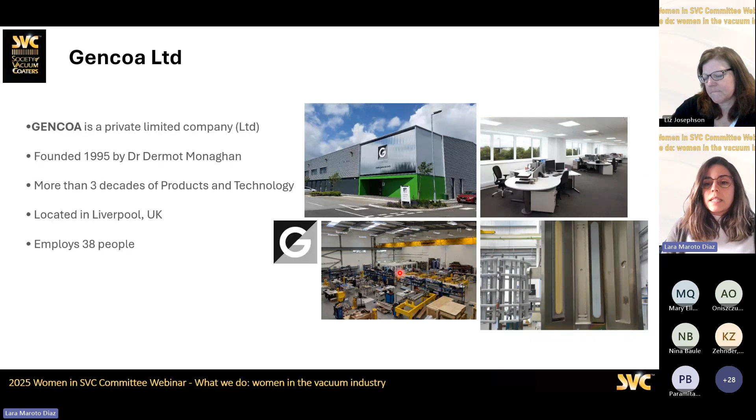More specifically, most of our products focus on sputtering, but there are other products focusing on other vacuum applications. So, a bit about Gencoa.

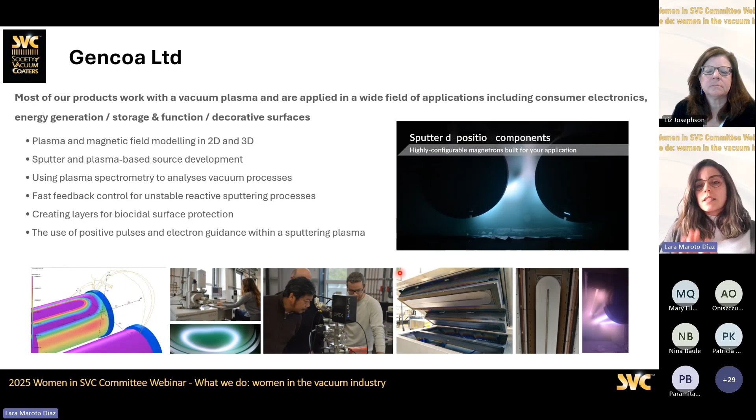We have been applying vacuum plasma for a wide field of applications—I'm going to talk a bit more about the applications later. We have been doing plasma magnetic field modeling in 2D and 3D, developing sputtering plasma-based sources, and using plasma spectrometry to analyze vacuum processes. We can implement fast feedback control for unstable reactive sputtering processes. You can see from some of the images and the video how we have a broad field of application for different products.

I'm going to focus on sputtering within physical vapor deposition, because it's mainly what we make sources for. Here you can see a vacuum chamber. This vacuum chamber is pumped down, reaching pressure levels of around 10^-5, 10^-6, normally. Then this is the magnetron, and normally you will connect a negative voltage to it.

As a standard sputtering setup, you would not have any magnets on the back. But what's special here is that we add a magnetic pack to the magnetron behind the target—that's the material that you're going to coat with.

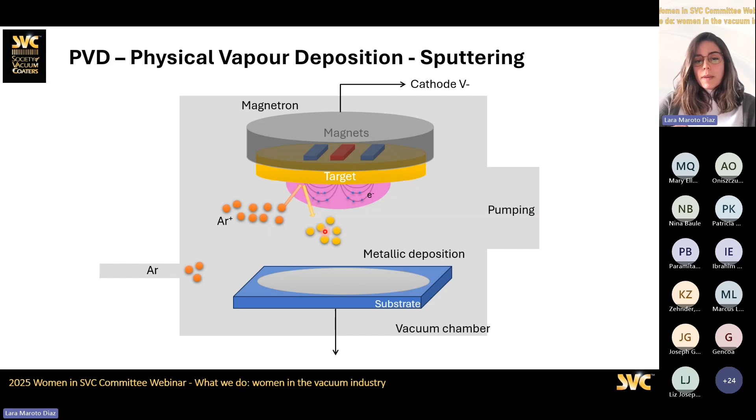With that magnet that contains in the magnetic field electrons that are going to be created, this allows you to lower down the power needed to create a plasma and maintain it. So these electrons, these ionized gas, this plasma that is created is going to ionize an inert gas that in most cases is just argon, so this gas is not going to react at all with the target material. What it's going to do is sputter, so it's going to have an impact on the target, and that is going to release some of the material from the target, which could be many different materials, and that is going to get deposited onto a substrate. And that's what we call normally metallic deposition.

And when you introduce a reactive gas, in this case I have put oxygen, but it could be other kinds of gases like nitrogen, this gas is going to react with the material that is coming from the target, and that is going to form a different type of layer that in this case could be an oxide deposition. And then after that, all these gases are continuously pumping down, so you maintain the level and the cleanness of the vacuum. This is more or less overall how sputtering works.

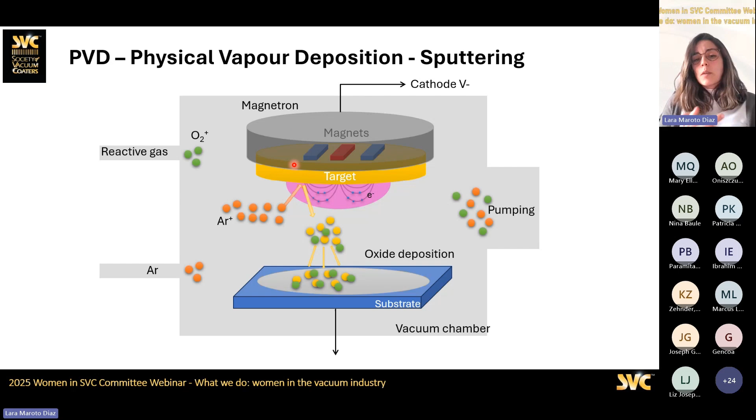So what we focus on is creating these devices, among others, but mainly originally these devices that can be of many sources. You can have different powers, different types of power applied to it, like Anna is going to tell us later. And you can also have so many deposition systems. So I just put in some examples here of ones that I know well.

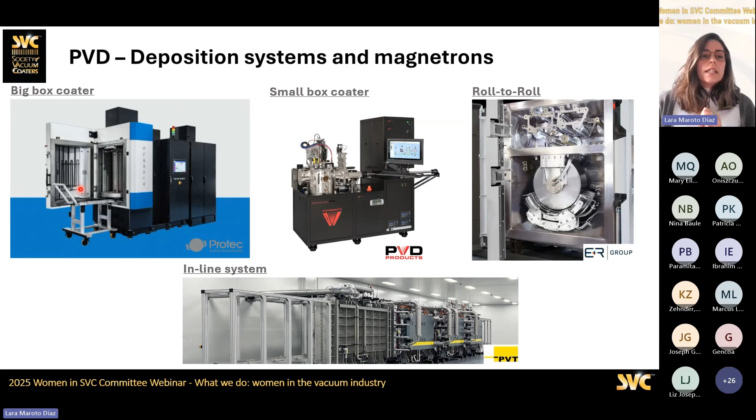So we can have big box coaters, where you can have different substrates that are being coated all at the same time, normally more like 3D or 2D, very small substrates that are put all together. In this case, normally there's so many different technologies that you can use, but for example, a rectangular magnetron is one of the typical products that could be used because it has a larger uniform area, so you can coat bigger substrates.

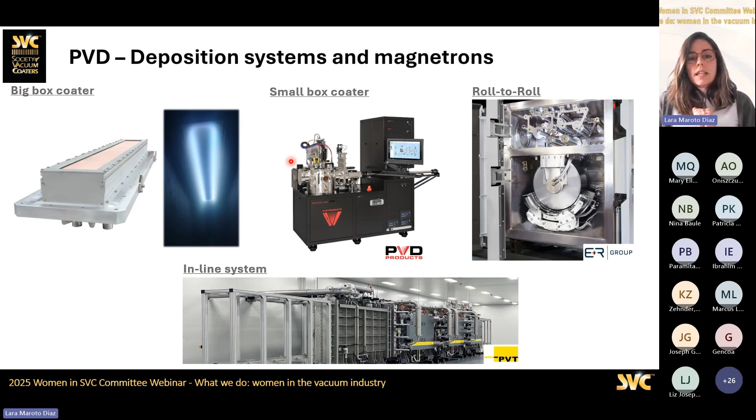Then you can have a small box coater like this one on the right. So normally for this type of small box coater, circular magnetrons are mostly used. It depends on the substrate geometry.

For roll to roll, like Liz is going to tell us later, one of the big products used for it is the ion source. This is kind of the opposite to a magnetron. What we do is use ions to impact onto the substrate and clean it for pre-treatment or post-treatment of the webs that are going to go through it.

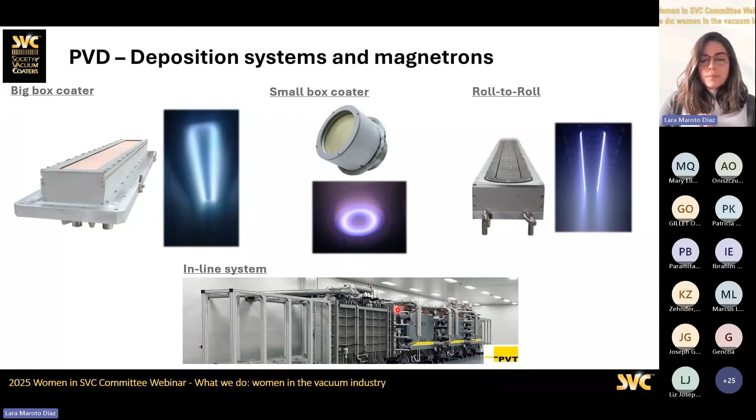And an inline system, this is to maximize throughput. So you put the substrate at the beginning, and that goes into an inline system, all continuously coating, pre-treating, heating, and then it goes out, so you have a continuous production. In this case, for example, some sources that can be used are the rotatables. The target is rotating around, so what you maximize is target use, and you extend the target life.

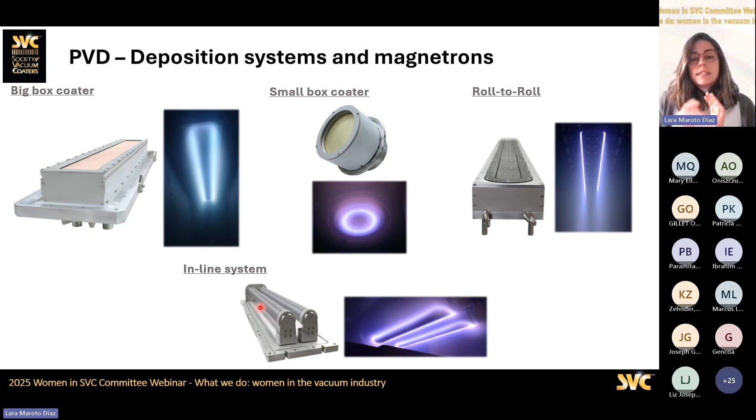Then we could have other different magnetic options, like for example this one, that you can rotate and convert from being unbalanced to more balanced during the deposition. High yield for precious materials. As you can see here, you can use much more of the material.

And we have, in our case, another type of product that is mostly for vacuum applications. In this case, it's used for reactive sputtering control, but also for optics, even if mainly right now it's also used for sputtering and vacuum for PVD applications. It has a wider range of market, since as soon as it involves vacuum, most of them can be used as a gas analyzer, but we are also creating a plasma within it. So it's everything related to vacuum and plasma.

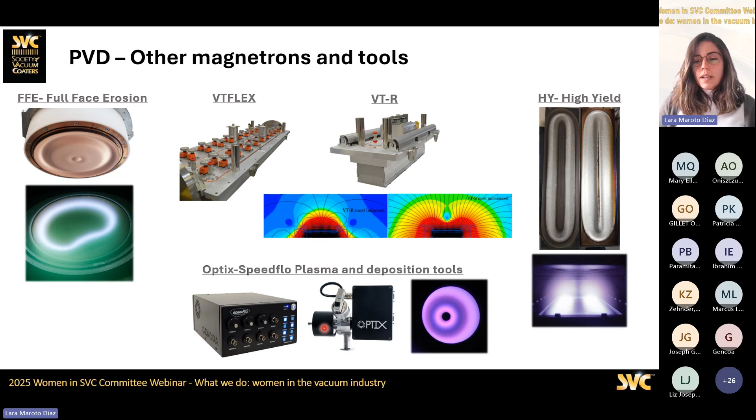So in the applications, I'm not going to go through all of them because I could be here for days, but we have, for example, decorative. As all of you may know, in your phone you have a lot of different coatings that are coming from sputtering, but we have some decorative, more functional, like the ones you have in the phone.

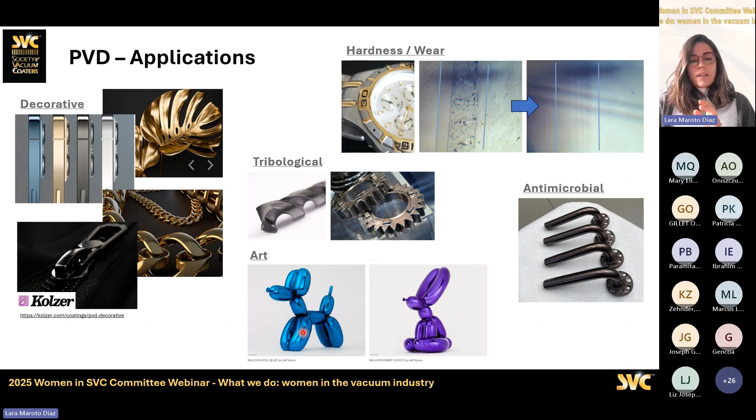You have hardness and wear, for example, for DLC coatings to avoid damaging and scratching of the surfaces. You have tribological for hard tools. You have, for example, nice applications like for art, like the Jeff Koons balloon dogs. We have also antimicrobial for high touch surfaces.

We have also energy efficiency applications, like the electrochromic coatings that you may have seen in planes. For energy conversion, like all the solar stacks that can be created, packaging, like the internal of Tetra packs, optics, transportation, like the glasses of windows and the screens of planes, and electronics, like for the semiconductor industry and all the chips inside your laptops and your phones.

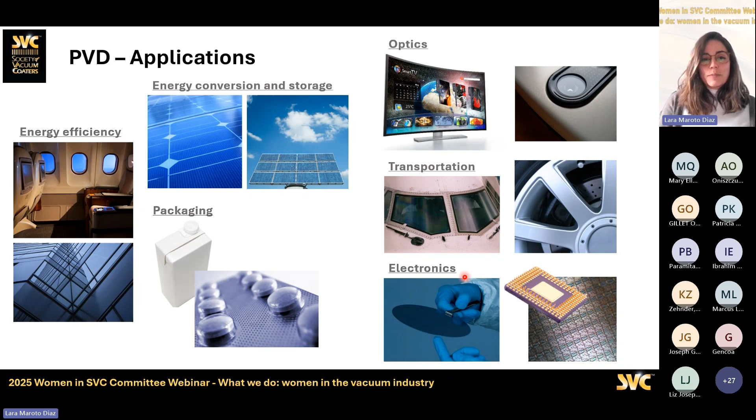So a bit of my journey. The beginning of it was in research and development. I arrived in Liverpool in 2020 on an Erasmus internship. As I was studying a master's in biomedical engineering, I had to do my thesis.

So I decided to come to Gencoa. They offered me a position, and I came to do biomedical application coatings, more focused on high touch surfaces. I was doing basically everything from the coating to analysis, studying technical papers, all related to that, and the antimicrobial tests to test the coatings in-house.

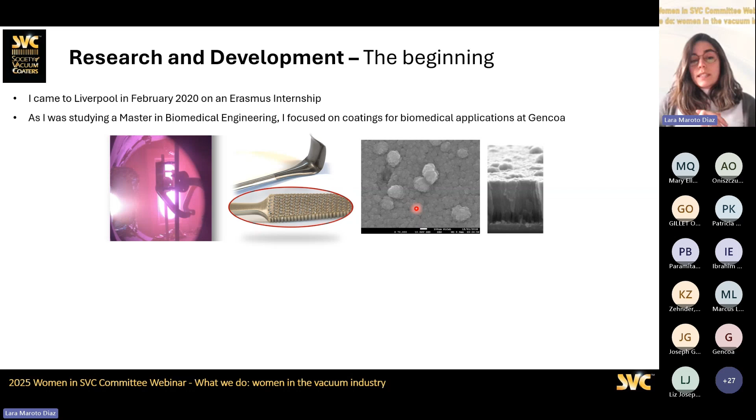At the same time, as I studied telecommunication engineering, I was also involved in the development project of an oxygen sensor called Vacgas. I was developing and designing the electronics and the firmware. So two completely different worlds.

For me, I didn't have any physics background, just the physics I was studying in the degree, but it wasn't related directly to plasma. I didn't know what a plasma was when I arrived. So that was a completely different world for me.

At the same time, I was doing two completely different projects. The Vacgas is something we use for vacuum analysis for oxygen, but it's not really related to vacuum, what I was doing. So as you can imagine, it was quite far from what I was really studying at the moment or anything I had learned before. So it was quite a shock.

And at the same time, it was in another country, not my first language. So it was a big change. And also it was during COVID time, so you can imagine.

Then from 2020 to last year in July, I have been working in R&D, so at the same time I started to be involved in many different projects for government grants. We have some government grants we have been applying for, developing new technologies in collaboration with different companies, but also for some customer applications.

Some of the customers can have some of the lab developed coatings and they want to industrialize it. So we are like in the middle there, developing some of the coatings here in bigger machines, and then we can also advise on how to create an industrial production for it.

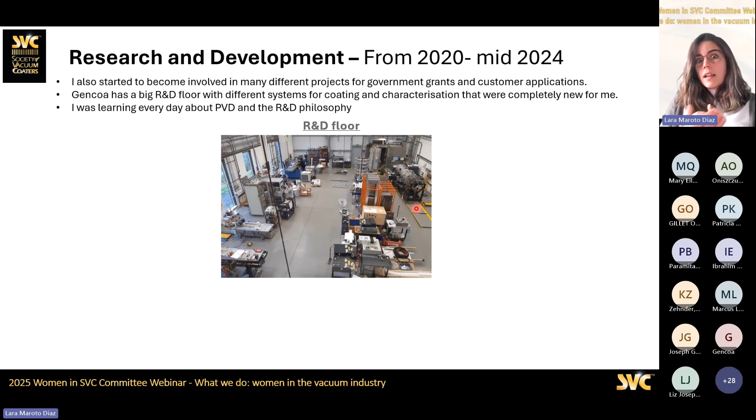So we have so many coating systems, I think it's nine of them. They have different magnetrons, different applications, different geometries. We can do 2D, 3D kind of inline systems, but a small one, and we have a big one like this one that you saw on the left with 1.5 meters.

So I was, as you can imagine, every day learning a lot of many things. But it was so interesting, and obviously I really learned about PVD, and everything is impossible because this is like a lifetime learning. But I also learned about the R&D philosophy behind it.

So we have a lot of characterization systems too. We could have more, but for that we use universities. We get help from universities and research centers to help us with that. But we have a few of them here. So many of them I didn't know anything at all about.

So it was also a learning of how to measure light transmission, reflection, all the antimicrobial coatings, the SEM. So it was quite a broad spectrum of things that I had to learn.

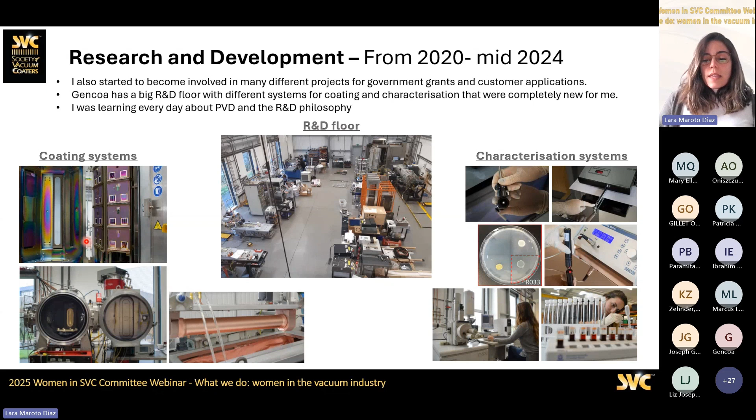And then last July, actually, when I was at SVC 2024, I was one night sleeping after a whole day of conference, and I decided that I wanted to give technical sales a try, because I really enjoy talking with the people at SVC. They taught me a lot of things I had never learned before, one way or another.

You learn a lot from customers, what are their necessities, what do they want. You learn how to listen to them and how to answer the questions. That is different than being in R&D.

So I decided to go for it. It was good because with all the technical background I acquired for 4 years in R&D, I had many things that I would not have had if I would have changed directly to another company. So it was fantastic. I obviously like Gencoa a lot, so that's what I decided also to try it internally.

Obviously, my post-its are my best friend right now. Everything that I have to ask or have in mind goes into a post-it. I know it's not a very sustainable option, but they save my life right now.

I have obviously a lot of questions still, because even if I have some of the basic and important technical knowledge from R&D, it's a lot of new questions now into sales, into design, the intrinsics of the products, applications. You have to understand what the customer wants. You have to know how to ask the questions properly so they can understand you. It's different countries, different languages, different ways and cultures and applications.

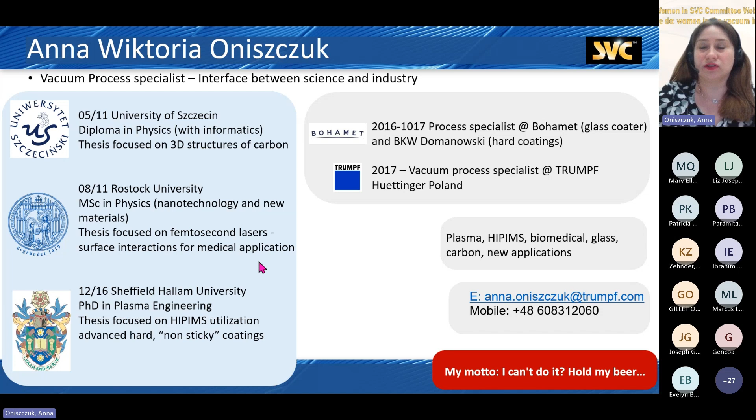And then in 2017, I moved to Trumpf Huettinger because it gave me a lot of options in developing myself and in researching with HIPIMS technology. So I could go more and more into this.

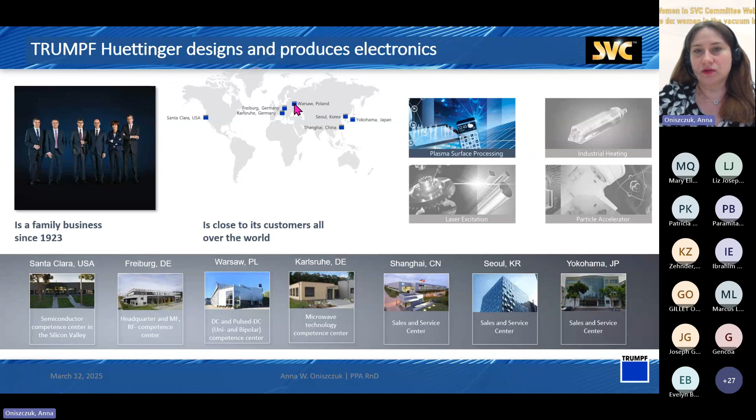Trumpf Huettinger is a family-owned business. Generally, Trumpf is a big company with a lot of branches. I'm in the plasma surface processing, and it has a lot of units. I'm located in Warsaw, in Poland, and I'm located within the R&D technology team.

In the R&D, we have the plasma application group that was started in 2018. And the interesting thing is that we have quite a few women in here. So we have 3 within the 9 people in the group.

So I think for the statistics, it's quite nice. And in Poland, because it's divided by also different locations, and in Poland, most of the people sitting in the office are women. So I think it's quite nice to show here that in Trumpf we look also about the quality of the people, and we don't look at it that only men are going into technology. So we have quite a lot of girls in here that I really like.

And now let's go to the journey of HIPIMS. So I will give only the basic information, because with HIPIMS I can talk for hours and hours, and I hope that I will not take too much time here.

So when we think about magnetron sputtering, typically there will be a DC discharge when you deliver power over time with a constant manner. And sometimes there will be also pulse DC. And you will operate in about the kilowatts range. And if you want to go to denser coating, harder coating, you want to increase the power.

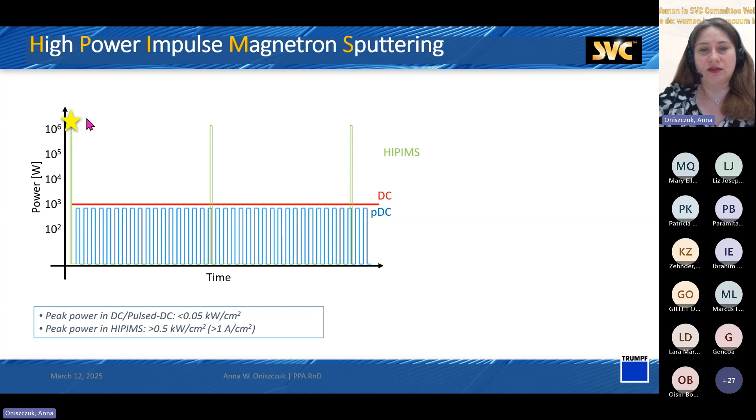With HIPIMS, you can go with very short, very intensive peaks that go to megawatts, and then it will provide you very high ionized flux of the sputter material. Because it's only 30% maximum duty cycle, it gives a lot of energy within a very short time, and then gives time to cool down for the system and power supply to charge up. Again, delivering pulses, high power, high flux.

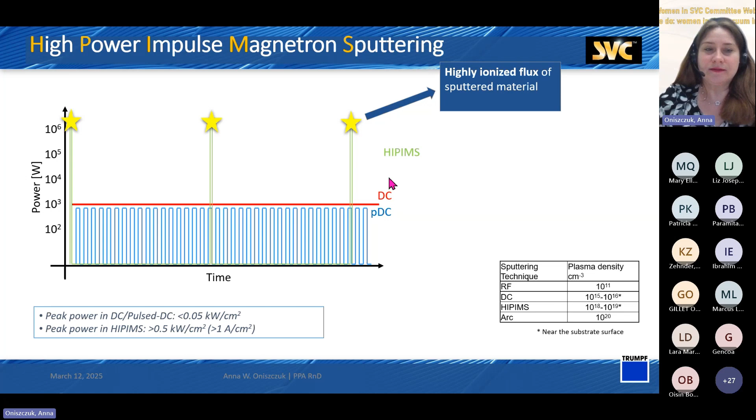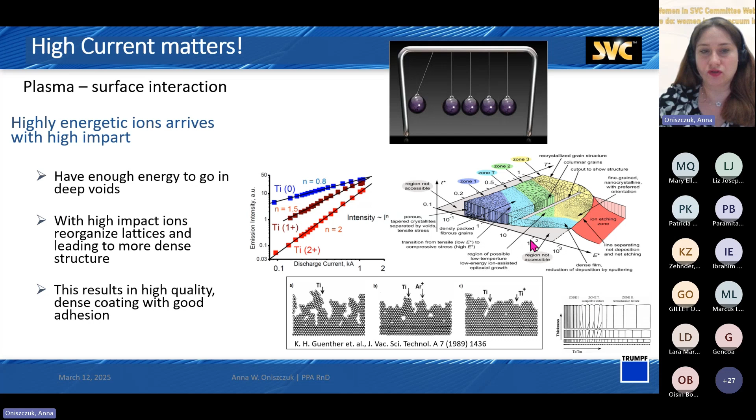So what happens? When you have very high energetic plasma, you have a very good plasma surface interaction. So you have accelerated ions that arrive to the substrate, and by hitting one another, they can densify the structure. More ionized plasma, more plasma current you have inside, the better structure you have, more dense, less voids in between, and thus the mechanical properties of the coatings are much better. That's very good for a lot of purposes, and you can have a very good smooth surface - you don't have so many macro particles. You can improve the adhesion, and you can get very good control over the stoichiometry of the process.

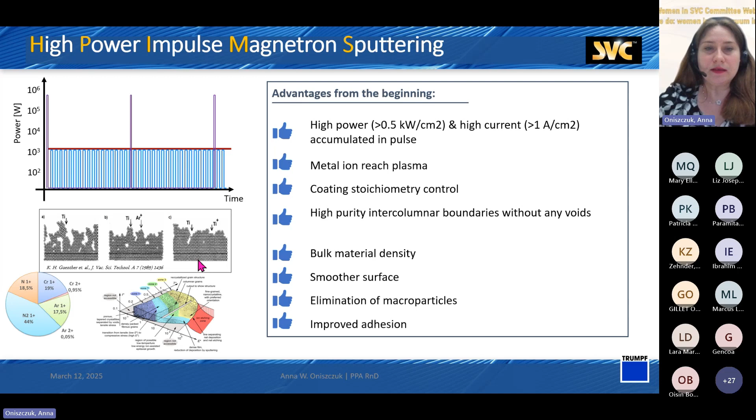Just very quickly comparing with DC: within DC, you have very limited power, only at the low energy level. You can see that it's mainly dominated by gas - by the argon ions and argon neutrals, and also by the gas, if you have reactive gas like molecular and some dissociated nitrogen, that will lead to a very columnar structure, and you can see some voids in between the system.

In case of HIPIMS, the energy is delivered at also higher levels, so you can have both low and high energy, and this leads to plasma that has a higher ionization level of argon. But what is most important, you will have much more percentage of the chromium, and also much more dissociated reactive gases, which you can control the stoichiometry of, and that will result in a very dense, very hard coating.

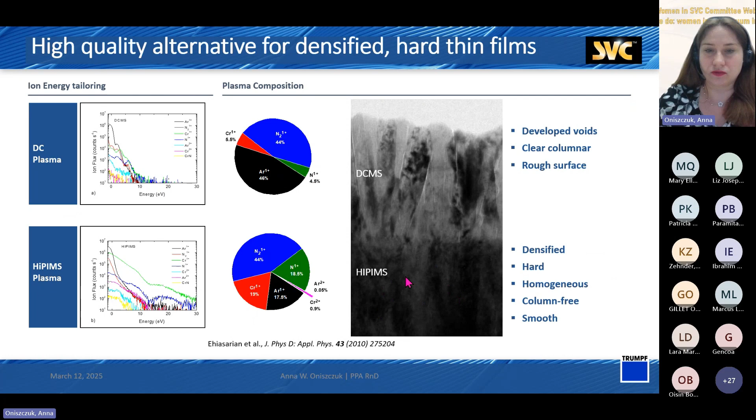Hard and dense coatings you can also get with cathodic arc deposition. However, here's the problem: cathodic arc is a bit different technique, where you deliver a lot of power within one spot, and there are some effects where you have melting on the target, and you create a lot of droplets, and then these droplets will solidify on the surface, leading to macroparticles, which can, for example, fall off and lead to lack of corrosion resistance, and also lead to a very rough surface.

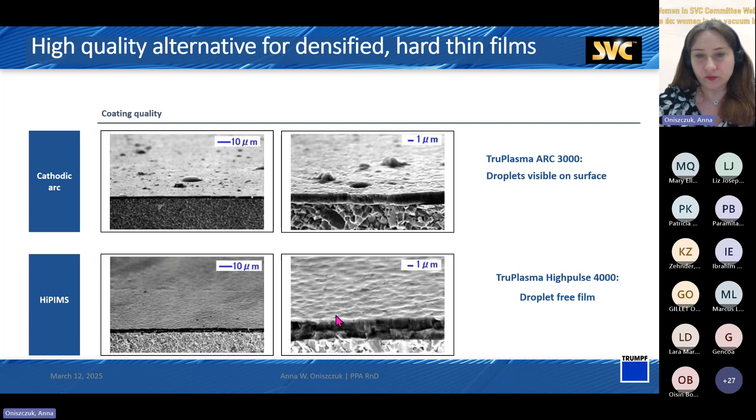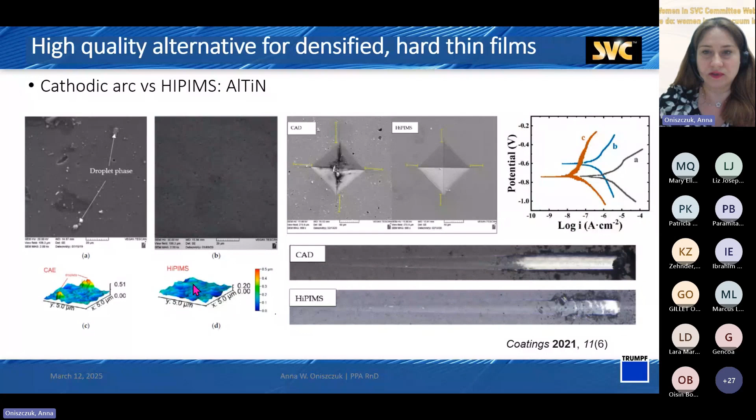With HIPIMS, you can obtain very good smoothness, good density of the coating, and very good properties of the coating. Here is some research comparing HIPIMS and cathodic arc, and the mechanical and corrosion properties were much better. So here is the corrosion: A is the bare substrate, B is the cathodic arc, and C is the HIPIMS. Also in the imprint, we can see there is much less damage. And from the scratch test, we can see that the load is much better and the roughness is much lower of the substrate. That's just one example.

Then the applications - there's a lot of applications limited here by time, but the main ones were cutting tools and also some anti-corrosive properties of the coatings. Now, quite often we can see applications for microelectromechanical systems and some micro tools, solid lubricants, anti-reflective and anti-scratch.

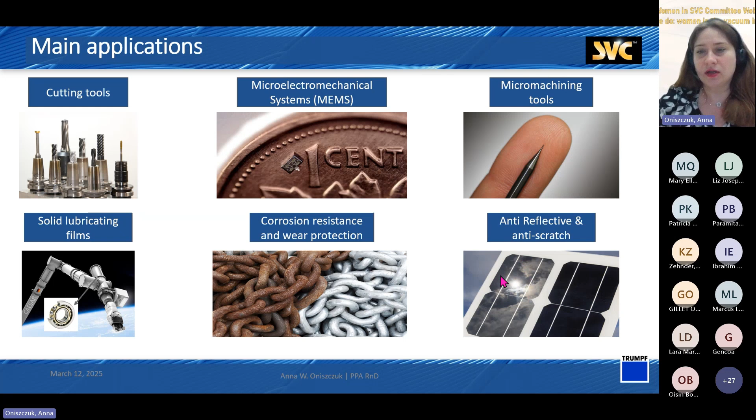For the anti-reflective and anti-scratch, I want to show you some results made at Sheffield Hallam University, where we investigated silicon oxide film, and the hardness was increased compared to the standard technique. We investigated the influence of different parameters like reverse and reverse delay on the transmission. So not only can you increase the hardness, but you can also tailor some transmission optical properties in order to get a very good protective top layer.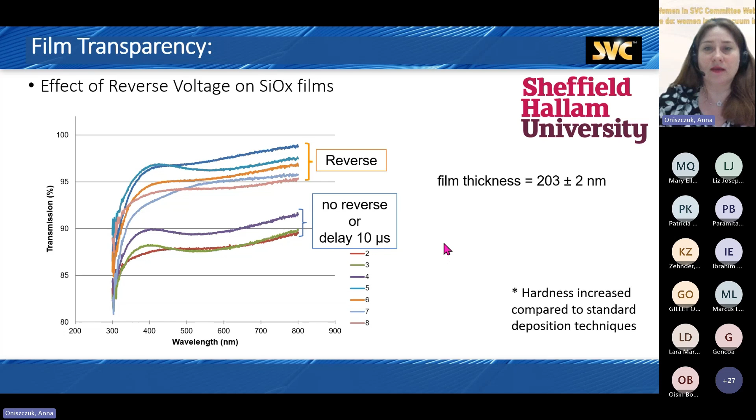However, there are some downsides of HIPIMS, because when you have a standard process, any process, there are a lot of parameters that you have to take into account. So the properties of how you grow the coatings will depend on the gas properties, what substrate you have, the material source, what target type, what target material, also how much energy within the plasma you have, and also the power supply - how you will run it, which kind of power supply, which kind of discharge.

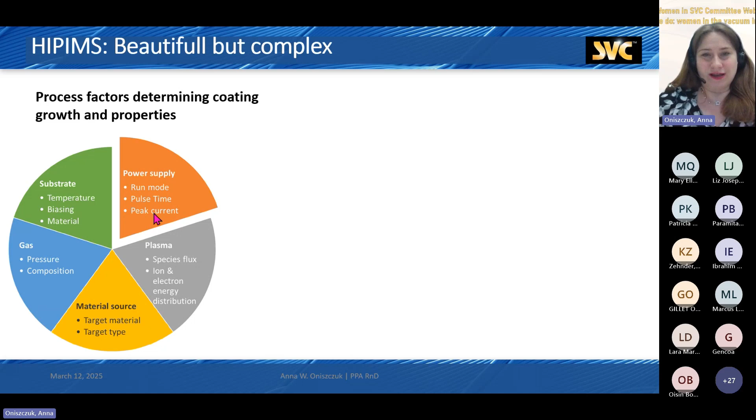When it comes to HIPIMS, there are quite a bit of other things you have to think of. There is big influence from magnetic fields that will lead to self-sputtering. And within reactive sputtering, you have to be more careful than with DC, because there is more dissociation. So you have to know what you're doing. You can control it very well, but you need to take into account much more reactive processes.

There are plenty of different modes and shapes on the market, and for different applications you need to use some other setup. Sometimes you need reverse, sometimes dual magnetron sputtering, and there are multi-shapes - this is a lot to take into account. It's part of my job to support with this technology.

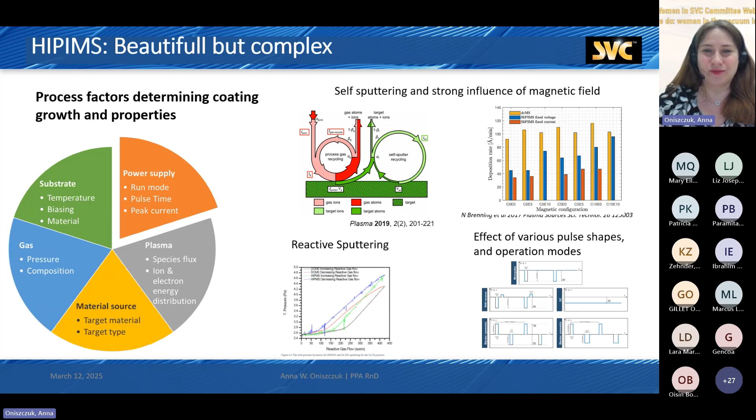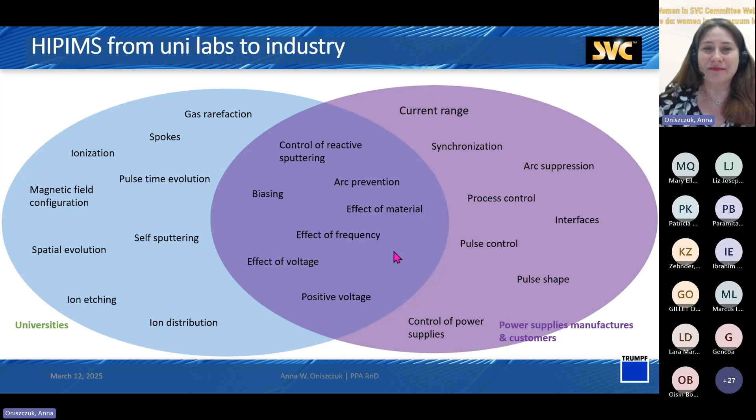There is a lot of investigation, both from universities and power supply manufacturers, because there are so many topics still to investigate. Some of them are already known, but there is a lot to dig into. That's why it's so exciting - it's a mature technology already used in industry, but there is so much more to dig in, to investigate.

So what do I do in my work? My position is vacuum process specialist. My first task is in-house and on-site customer support. There is a lot of customer training, because customers need to know how to use this technique, how to change from, for example, DC sputtering into HIPIMS.

I support product development, and I do some tests in the lab, and this also leads to chamber maintenance, because if you work a lot with the chamber, you need to make sure it will be working.

On the other hand, there is a part of R&D with internal and cooperation research, where I need to do scientific papers, look for possibilities for more cooperation, and there are also some project manager tasks.

And the most fun part is knowledge exchange and scientific marketing. With the information I gather, I attend conferences to share information, I can do networking, also some marketing writing, and in order to get more knowledge I also attend trainings and workshops.

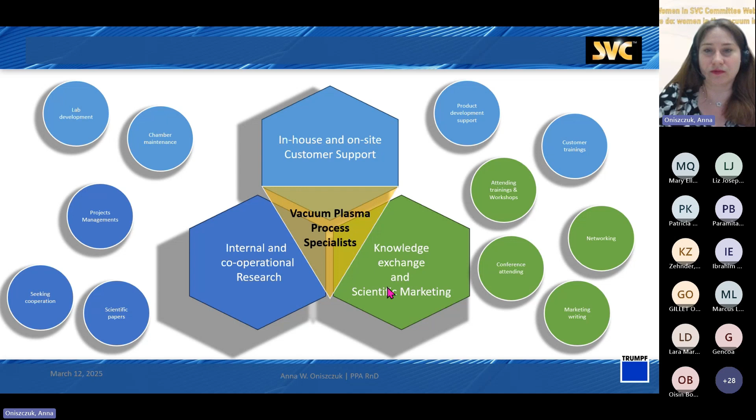From in-house tests, we have different chambers in the plasma group where we can do different kinds of tests. We can do plasma tests in the chambers, like a small chamber for a batch system. Also here we deposit samples, then the samples we can test.

However, most of the investigation we do with the plasma, with optical emission spectroscopy, and with a homemade plasma current probe, because this gives us very fast indication if we're going with this process in the right direction, if we increase the energy, if we increase the quality of the plasma. Then we can deposit coatings and do simple tests, or do cooperation and send samples for investigation.

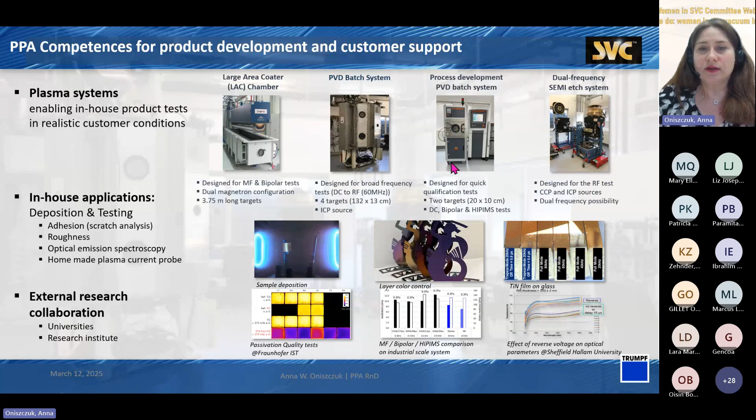To summarize, I really have a big passion for HIPIMS technology, and I love working with developing applications and HIPIMS itself. There is still much to discover with HIPIMS, and Trumpf gives me the opportunity to do that. If you have any questions, you can send me an email or call me.

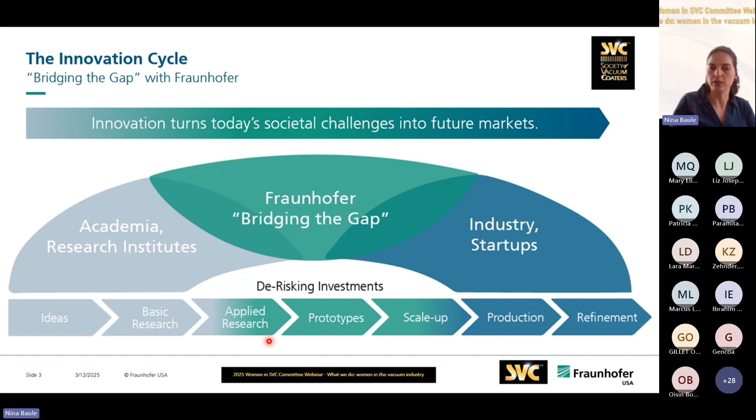Our funding mechanism has a big variety of government funding as well as industrial funding. On one hand, we do a lot of public research where we apply for federal or state funding, usually in cooperation with a university as well as national laboratories, for example.

This public research is really often supported by internal research activities that we do. These could be on a Fraunhofer USA level, but also on a global level, where we specifically partner a lot with German Fraunhofer institutes to drive certain competence areas forward. On the other hand, we also have industry customers where we do R&D work for them because they might not have the capacities at their own facilities to do this work. That shows you very well what I, on a daily basis, interact with - a lot of interactions with MSU professors and national laboratories, and then on the other hand, my industry customers.

Coming down more into Fraunhofer USA, it's a non-profit organization here in the US, and there are basically three main centers. One is in Maryland, where we focus on software development and artificial intelligence. Then there's one in Boston, where we focus on automation. And then there's the one in Michigan, that's where I'm located - the Fraunhofer USA Center Midwest.

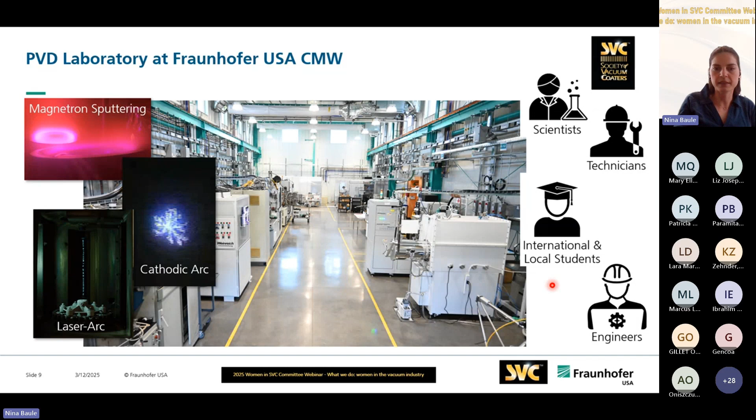The overall idea of what I do on a daily basis is developing thin film materials using PVD technologies. How I usually do that is I have a process, for example magnetron sputtering, shown here schematically, and I change my process parameters and see how that correlates with my material properties and material performance. This is basically a back and forth until I really have the function that I want from my thin film material

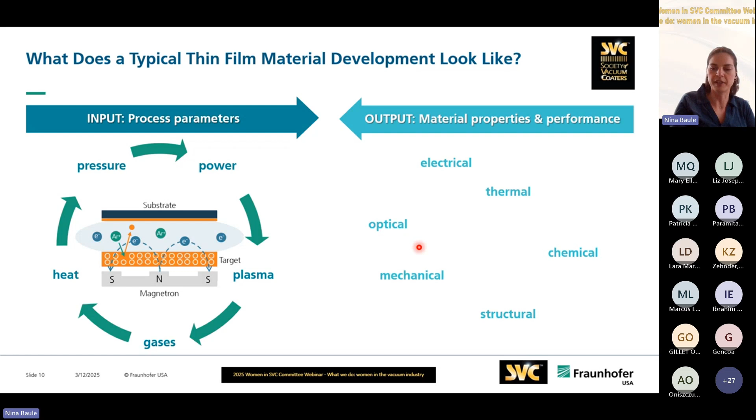that is for a specific application. The properties depend very strongly on the application. One example here is nitrogen incorporated tetrahedral carbon materials - this is the work I did for my PhD. I wanted to use this amorphous carbon material, also known as diamond-like carbon, and move away from typical wear applications for this material and use it for electrochemical applications.

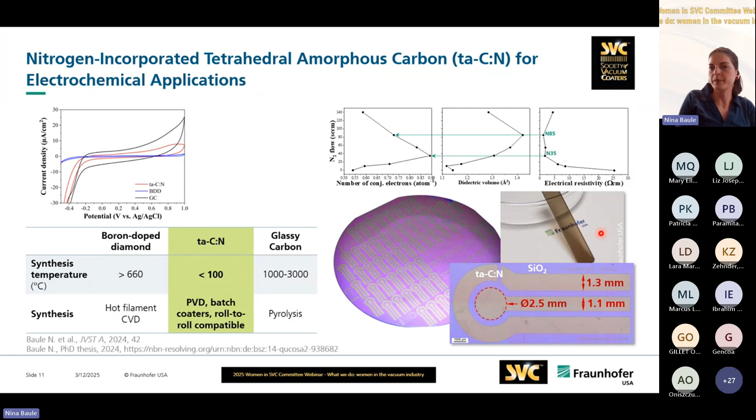So the overall scale-up and economical advantages are very clear, and we can potentially deposit it directly on polymer substrates. For my work I focused on the material properties. An example here on top is where I looked specifically at the electrical properties of these materials with a novel technique, and then used that knowledge to develop the actual application. Here on the bottom you see a 4-inch wafer with so-called 3-in-1 electrodes, typically used in environmental sensing or medical sensing, to push this electrochemical application or sensor forward. Another one was to develop an optically transparent electrode, which you see over here, which can be used for spectroelectrochemical analysis.

Another example for magnetron sputtering - what I showed before was an arc technology - is that we investigate a lot the single beam ion source enhanced magnetron sputtering, where in collaboration with one of our MSU professors who develops these ion sources, we try to enhance the material properties with this enhanced ion beam. The idea is really to densify the film and have another basic knob that you can turn to change your material properties. Here you see an example of indium tin oxide, where you can clearly see that the crystalline properties of the material change with the ion source voltage.

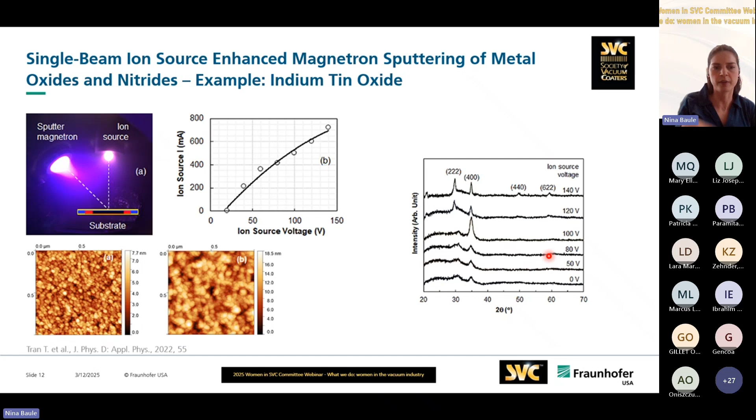So these are just a few examples I wanted to show you. There are far more that we work on, but that was it from my side. Thank you all so much for your attention.

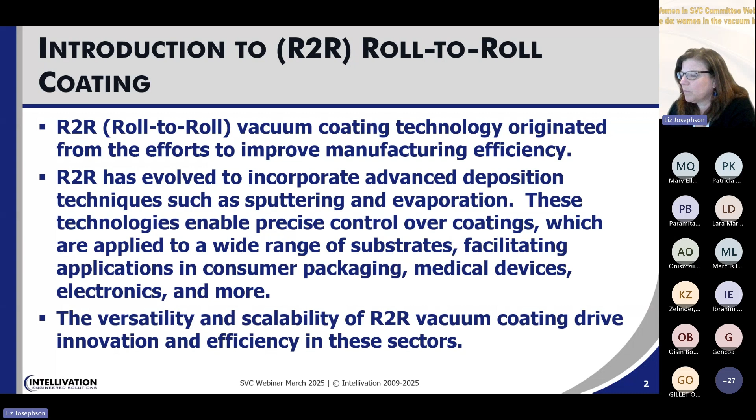Roll-to-roll technology has a lot of benefits. It has some limitations, but it does have a lot of benefits, and one of the biggest is that it's a very versatile and scalable technology. So you can develop a product and then transition to roll-to-roll. As long as you can get a material in a roll format, a substrate that you want to use, you can theoretically do vacuum deposition on it. So as long as you have the functional material that you want to put on a substrate, either optically or mechanically, or other properties that you're looking for, like barrier properties, if you can put it onto a roll-to-roll flexible substrate, you can theoretically use vacuum roll coating technology.

So this is the really cool thing about this technology, is that using the same type of systems, you can touch so many different applications. I know Nina talked a little bit about that, but just in roll-to-roll - this is not talking about hard coatings, this is not talking about glass or anything else, or semiconductor, this is just roll-to-roll technology.

So we cover a wide range of applications: electronics, energy with photovoltaics, batteries, solar control, window films, you have sensors, biomedical sensors, diagnostic sensors, and I'll show you some examples of that. And there is also a whole other range of applications: aerospace, barrier, optical coatings, holograms - I'll talk a little bit about that - security and anti-counterfeiting, and other specialty applications.

And all of these have a long list of requirements, but the key to what I'm talking about, and this is focused on, is the flexibility. Flexibility can be looked at two different ways for roll-to-roll. One is that you need a flexible substrate - it has to be able to be wound onto a core and put into a vacuum chamber and unwound and then rewound.

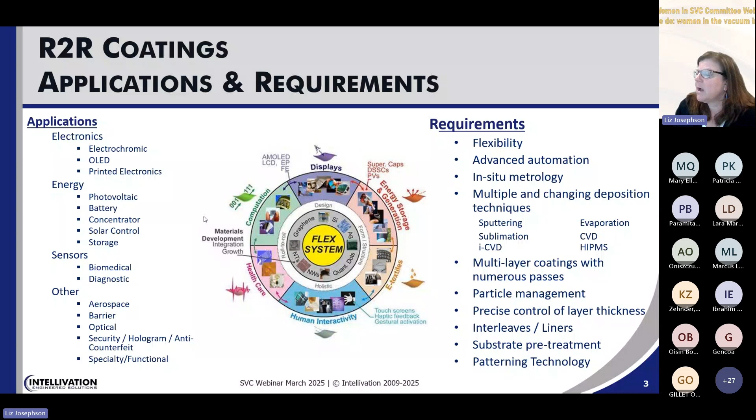But flexibility also means we can have a variety of different sources. We can do a lot of different things to the substrate as well to have it perform to the final needs of the customer. So there's a lot of things that go into a roll-to-roll technology, into a roll-to-roll product, and I'm just going to touch on these very, very high level.

The most common roll-to-roll application is in the food packaging industry, and all of these technologies, I'll say, are global. Especially food packaging - it's the largest market by volume, and there's probably the most number of roll-to-roll vacuum coating machines installed for this technology. So you're running at very high speeds, up to 18 meters per second.

You're putting down a very simple aluminum layer, but it's providing a barrier, and the barrier allows for, just in snack foods, either a light barrier, a water barrier, or an oxygen barrier. So it's really applying 3 different types of benefits to the product, and that's the biggest volume of materials used for that.

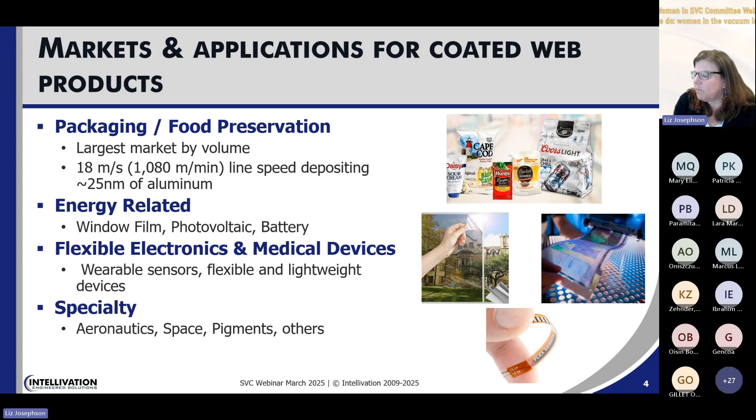Then you have other applications which I touched on: energy related, flexible electronics, medical devices. Most cell phones have a flexible transparent conductor in them, as we go to lighter and lighter weight cell phones. And then you also have a lot of specialty other applications.

So just a very general overview of how roll-to-roll works: everything has to be put in a chamber and pumped down. So you need, as I said before, your substrate in a roll format. You put it into a machine, you typically unwind it. Typically it's coated on a drum so that you can handle and work towards thermal management issues, heat or cooling related, and then you rewind it. And all of that is done inside the vacuum chamber.

So there are different ways to do that. Very few have done it in free span, where there is no drum associated with it, so they don't have as much control over the thermal management of the substrate.

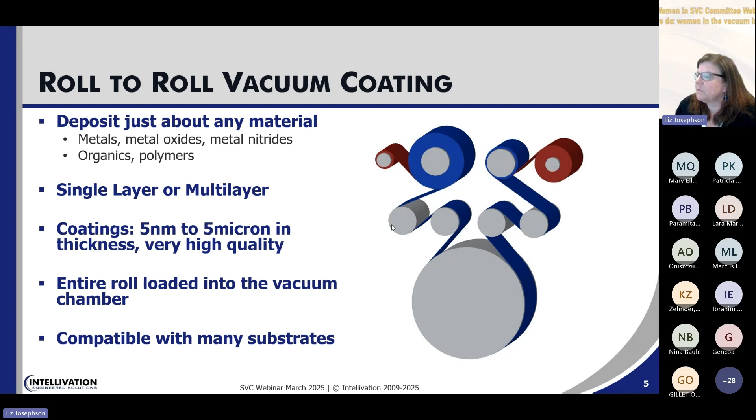But typically there is some sort of drum that is supporting your web, so we can do a ton of different materials. The nice thing about this is you can deposit a lot of different materials, and we've also run a lot of different substrate materials, and I'll talk a little bit more about that in a minute.

This just kind of gives you an idea of how broad vacuum roll coating deposition is. So when you look at packaging and window films and holograms, gift wrap, things like that, more commercially available products, they typically start about 2 meter wide machines and go up to 4.5 meters wide. That's a pretty significant amount of material that you're moving through at 18 meters per second, for food packaging and things like that.

Then you get into a little more specialized products, like solar control and window film, and they're about 1 to 2 meter wide machines. What Intellivation focuses on is systems typically that are around 0.5 to 1 meters, although we do the 2 meter machines as well, but these are more for fixed display applications, optical coatings, multi-layer coatings.

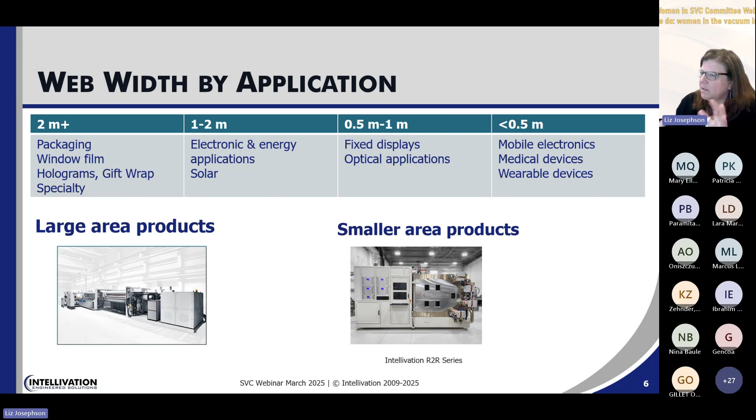There's also a market for smaller, less than half a meter machines. So you can look at mobile electronics, medical devices, wearable devices. Don't forget that some of these devices can be very, very small, 1 to 2 centimeters, or even smaller than that in millimeters. So it really depends on what your end product needs to be as to where you fit into this array of different sizes of systems.

There's also pros and cons for each, depending on where your application falls. When you look at these high speed machines, you have very high speeds, but you give up some things in terms of multi-layers or different functional layers that you can deposit in these systems. But throughput is very high on these wide systems. So you need to understand what your end product is, what sourcing you need, and what kind of line speeds match up with what kind of system would be perfect for your roll coating needs.

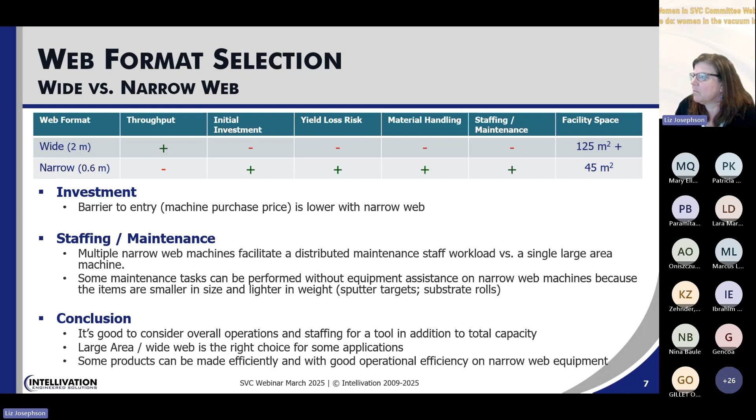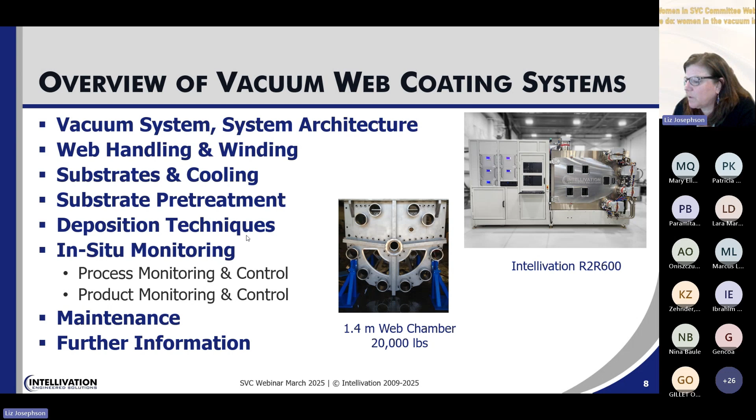This just shows you a couple of different systems, and when you look at the overall architecture of a vacuum roll coating system, there's a lot of things that come into play: web handling, substrates and how that can be impacted, surface substrates and cooling, as I talked about cooling drums before, pre-treatment, different deposition technologies as Lara mentioned, different power supplies as Anna mentioned. And then also, since most of our systems go into industrial applications, it's very important to have in situ monitoring, which I'll touch on for a moment too.

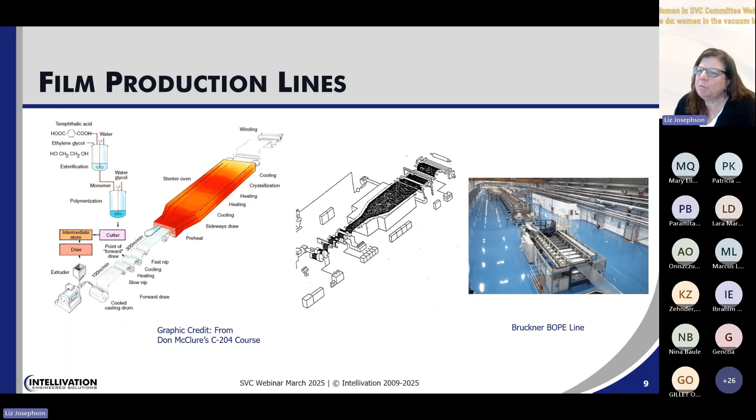When you think about this and look at high volume food packaging, this is just an example of two different types of high volume substrates that are made: one is polyethylene and one's polyester. These are made in very high volumes. Then you can look at an OPP line, which is biaxially oriented polypropylene, and those can be up to 8 to 10 meters, and I think 12-meter wide lines now. That's a huge volume of material, and a large part of that needs to be vacuum coated. So that's where you look at systems that are 2+ up to 4 meters wide, running at 18 meters per second.

When we talk about different kinds of applications, there's a wide range of materials that can be run. Typically not in those big machines, you don't see the flexibility there, but as you get into smaller sized machines more focused on sputtering technology particularly, you can look at different polymers, metals, as long as they can be rolled, textiles, ceramic, rolled ceramics, flexible glass - we've done a lot of work on flexible glass. It also depends on what your temperature requirements are, your optical requirements, whether you need a transparent substrate or can use something else. And also you need to understand your sourcing - can you get all of these materials in something that can be rolled and then put into a vacuum chamber?

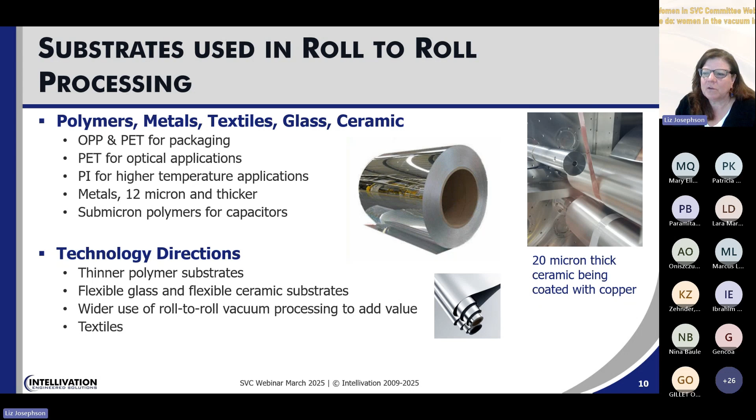So all of those are important to keep in mind when you're thinking about how to transition to a flexible type material. There are drivers that everyone is looking at—thinner, lightweight devices that are cheaper, textiles—all of these have an impact on your vacuum as well as how you handle them.

This is just a very quick overview. Pre-treatment is a big requirement in a lot of roll-to-roll applications, used primarily for three reasons: adhesion, degassing of a substrate if you have a substrate with a high volume of material, or cleaning the substrate. Depending on the quality of substrates coming in, you often have to do some sort of management prior to depositing something on them.

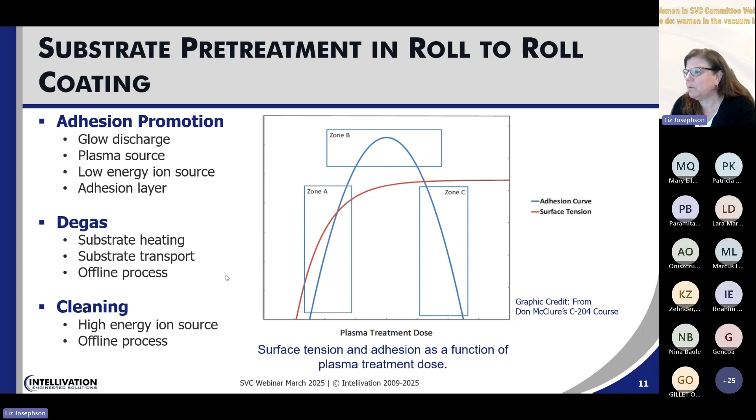Now I'm going to talk very roughly, and again remember I'm only talking about roll to roll. A lot of this is applicable to rigid surfaces, glass surfaces, or silicon surfaces in other aspects of vacuum coating. But specifically in roll-to-roll coating, there are a couple of predominant technologies used, and evaporation is one of them.

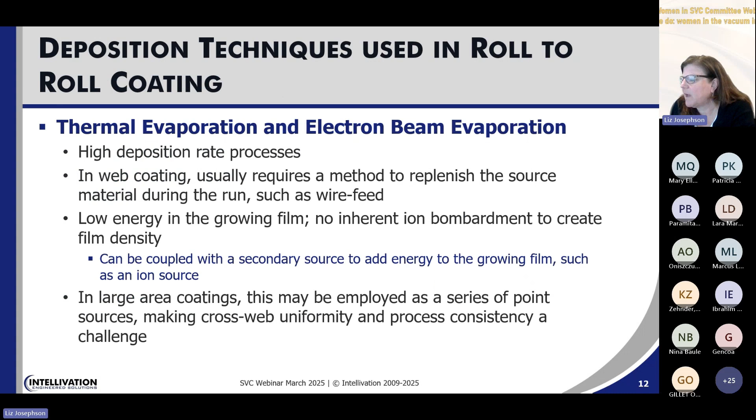Thermal evaporation is used in these really high-speed machines—high deposition rates, high line speeds, putting down single materials. Then there's also electron beam evaporation that can do very similar things, but you can evaporate a lot more materials. You can pretty much evaporate anything that you can put into a vacuum chamber at very high energy.

This shows you what the evaporation source looks like—these are intermetallic ceramic boats. Actually I forgot to mention how I got into this: I'm a ceramic engineer, and I originally started working with a company that provided the intermetallic boats for deposition, and that's how I ended up in this industry, then working with machine manufacturers who use these.

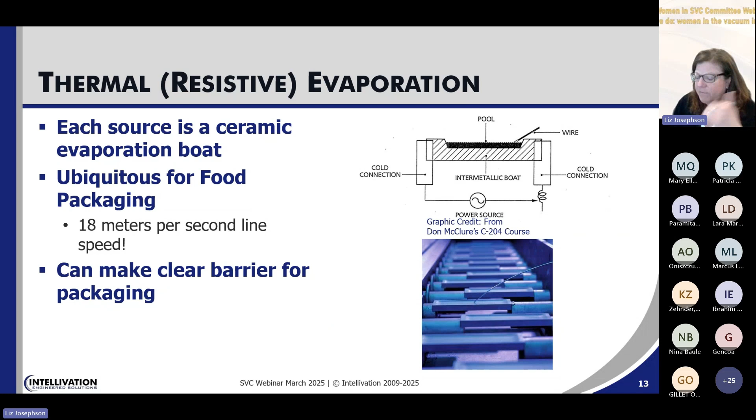You can use intermetallic boats, which is what's used for food packaging—feeding in aluminum wire and evaporating at very high speeds. Similarly, electron beam technology is very similar, where you have a very high-powered beam evaporating material, either an oxide, mixed oxides, or a metal, again at very high speeds.

One of the biggest applications for this is transparent barriers—when you look at clear barriers in food packaging or other flexible packaging applications, they're typically made using e-beam technology. It's also used a lot for security applications, like holograms. If you think about currencies, with different index of refraction layers, you can do that going back and forth using e-beam technology.

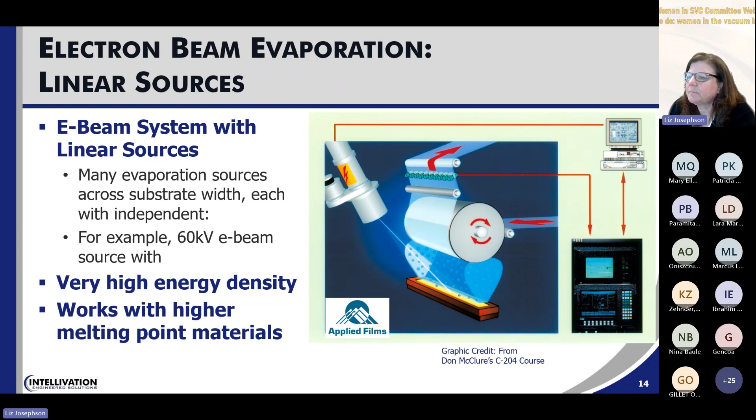There's also induction heating and evaporation that's not used as much anymore—that's kind of where the technology started, and then it transitioned to resistive. This gives you an idea of how a roll coater works.

You have a vacuum chamber with an area where you load a roll, unwind it, pass it over a coating drum, and then rewind it after something's been deposited on it, whether by evaporation, sputtering, or some other deposition source. This is typically how most vacuum chambers, roll coating chambers, are laid out.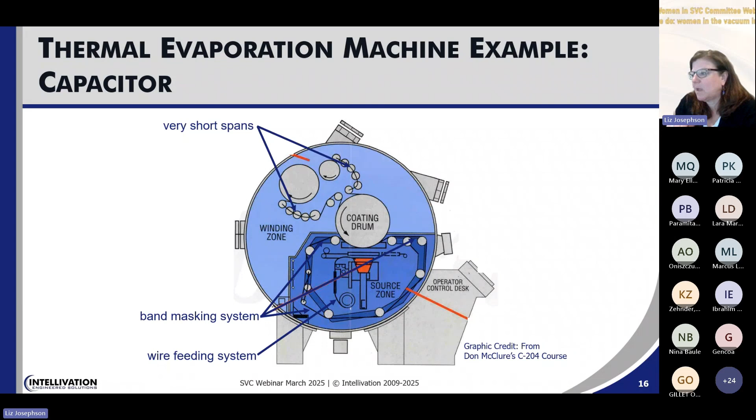And then we get to sputtering, which we've talked quite a bit about today, which is most of our core competency, although we do use a lot of other things. There's different types of sputtering - obviously rotary magnetrons, planar magnetrons, magnetic target sputtering. Again, here we're talking about all the different sources and power supplies.

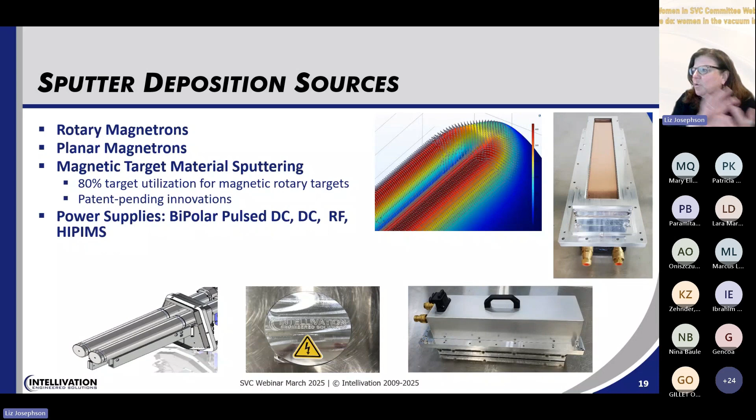And Anna talked about HIPIMS specifically. She touched on comparing it to bipolar DC, and there are other DC, RF, and other source technologies. So the combination of what you want to deposit will also start driving you towards which type of sources and power supplies you're going to use.

So here again, this is just a planar sputter magnetron, so you get lower deposition rates than evaporation, but you get really high quality, very uniform products, very repeatable, and very tunable. So you can have a wide range of materials, and you can also do reactive deposition.

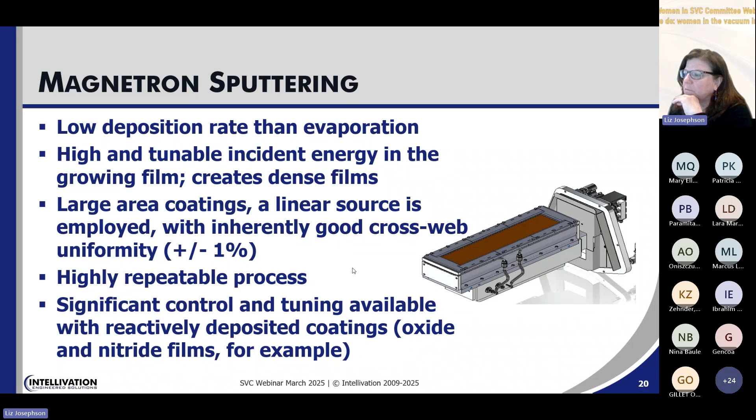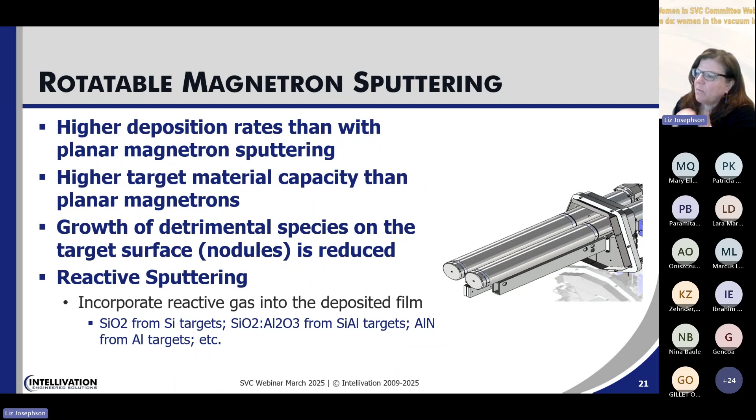So here I'm showing a dual rotary magnetron. That's used a lot for oxides, for reactive deposition. And being able to control the process very carefully is also very important.

I'm not going to go into much detail, but you can also look at CVD, chemical vapor deposition. Most of what we've talked about today is PVD, physical vapor deposition. You can also look at plasma enhanced technology, or ALD. So there's quite a bit of other technologies that can be implemented into roll-to-roll technology.

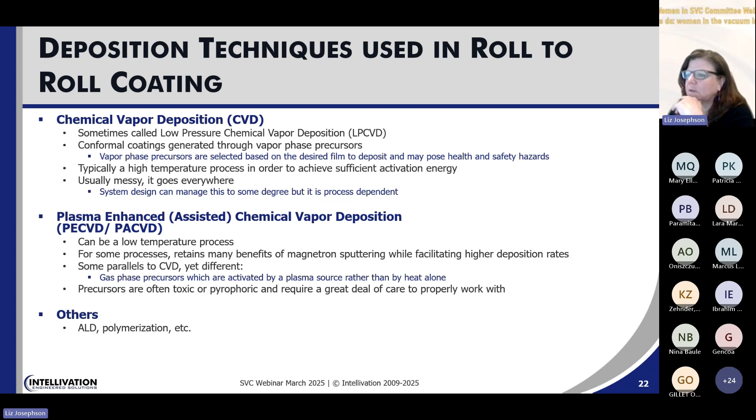And I mentioned this earlier - one of the very important parts is process control and in situ monitoring. This is where we've been pushing the envelope recently on some of our technology regarding in situ monitoring, opening up the wavelengths that we can monitor in situ. There are a lot of different applications, and each application requires different types of monitoring.

So here we also talk about reactive control. When you're sputtering, your reactive process control - how you control it, whether it's reactive with PEM, plasma emission monitoring, or volt modes - allows you to have very consistent and high deposition rates and to monitor them in situ.

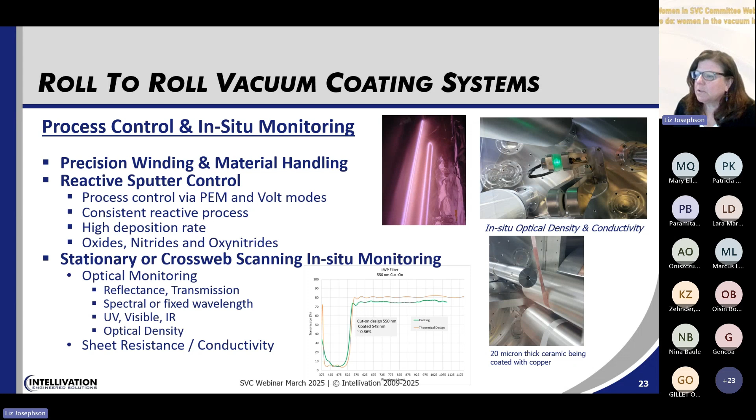And then I'll show you a little bit on, this is a bit of a busy slide, but it talks about metal depositions. So whether you're evaporating or sputtering, you can measure transmission in line or sheet resistance to give you your in situ and closed loop controls in a conductive or transparent conductive oxide system.

You can look at transmission, sheet resistance, as single point or multi-point, cross-web scanning. There's a lot that can be implemented into your roll-to-roll applications or your product. In sputtering, there's also a huge range in terms of single wavelength, multi-wavelength scanning, different spectral reflectance or transmissions. The key is if you can wrap this into a closed loop system for manufacturing your flexible product.

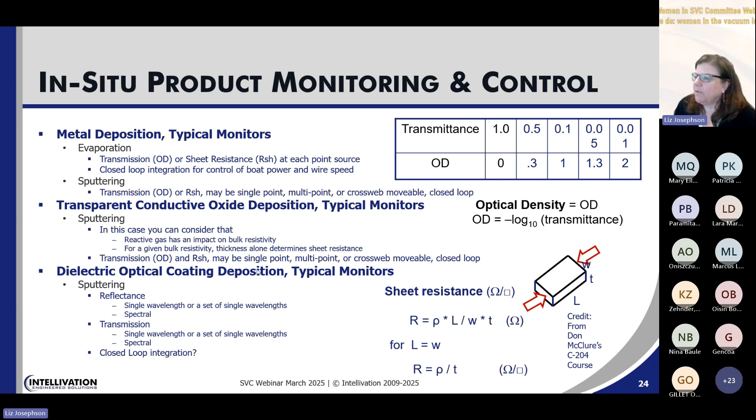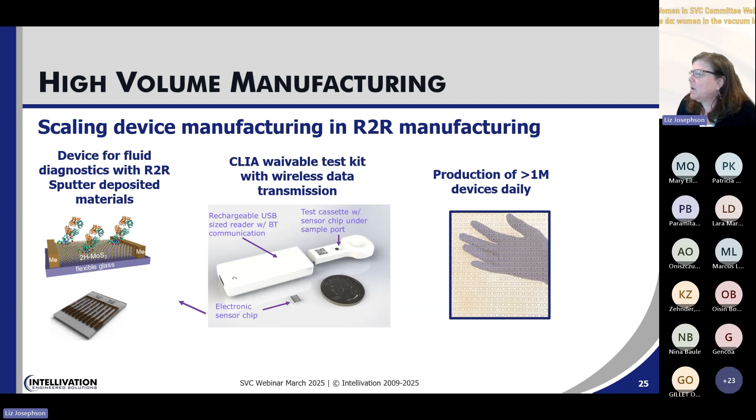So this is just an example of a biomedical device that was manufactured on flexible glass in a vacuum roll-to-roll system. This is also unique because we used some really cool laser technology to help modify the surface of the sputtered layers and change the morphology to help them work in these medical devices. As you can see how small these devices are, you're looking at a million a day, but you're doing that in just a few rolls a day of sputtered material, giving you millions of devices.

And this is a concept of the same thing - how you could implement all of this into a full-scale production line for roll-to-roll technology, including laser patterning.

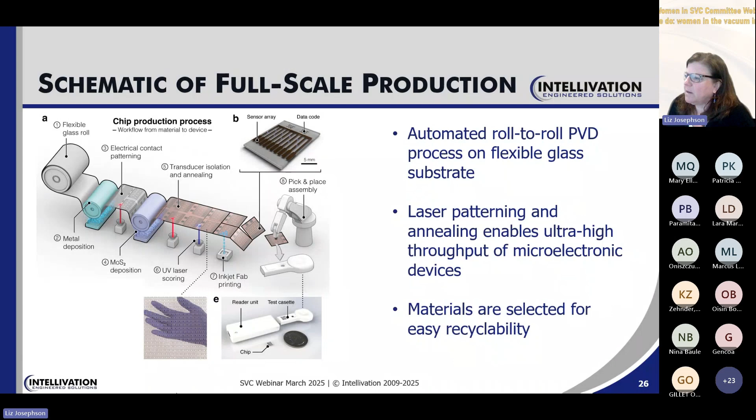So just in summary, I wanted to focus on a couple things. One is that for high-end applications for sputtering and roll-to-roll applications, you can use a lot of different technologies. We didn't talk a lot about it, it's a very short time, but we can talk about multi-layers, multi-pass. We have customers who do coatings that are 100 material layers thick, and they're passing it back and forth hundreds of times, all in the same pump down. So they're very complex, multi-layer devices. And there's a lot of in-situ technology that can be used to help you maintain and ensure you're doing this. Precision deposition is also important when you think about roll-to-roll technologies. If you can move to a flexible substrate, it becomes very cost effective to do high volumes of materials when putting different depositions down on them.